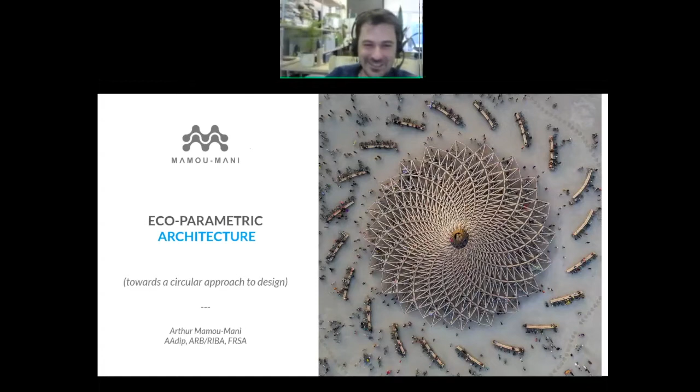You mentioned the WASP printers. We have quite a few of those, the 3 meters one, which allows us to do one-to-one, very, very large scale models, which is something that wasn't even thinkable when I was at the AA 10 years ago, where we were just, these tiny printers, these tiny lasers. But we knew something was exciting about it, but no one realized that they would become huge machines

that could actually do architectural components. And I just remember working in a practice and thinking, it's a shame, like I cannot use my skills that I learned. And there's no company that allows me to 3D print huge things, because we're talking, I don't know, 2008 or something.

And often when I go to Stuttgart and I saw these giant robots, people that graduate from there probably are like, oh, where am I going to work? Because where do they use giant robots? Like all the established firms don't have a robot in their office, right? And actually, it's surprisingly happening. But I guess in this case, the company stemmed from the fact that I couldn't find a company that really pushed that to the level that we could push it at the same time.

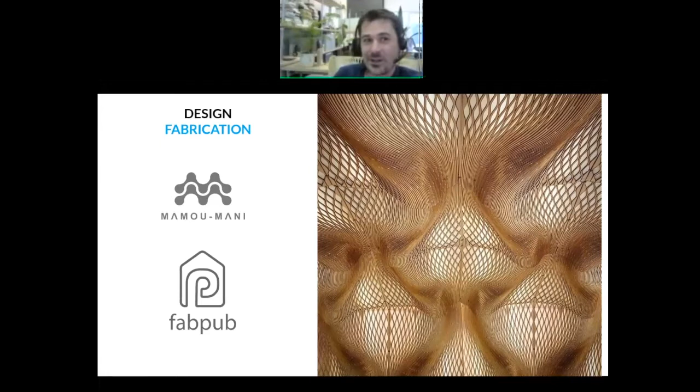So then I sort of freelanced as Mamou-Mani to help people, and then it became an architecture studio, and we ended up being hired as architects, which is why there's this duality between an architecture studio and a fabrication space. Both companies are now doing well, but it's funny how the architecture studio was maybe more recognizable in terms of an income stream. And so we ended up helping FabPub a lot until FabPub had a life of its own and is now doing maybe better than us.

So it's an interesting duality between what's very personal and very identifiable as an architecture studio with a signature, and then what's very public and for others to use. And there is always this dance between the architecture and the fabrication, and the public and, I wouldn't say the private, but the personal. And so this is downstairs now.

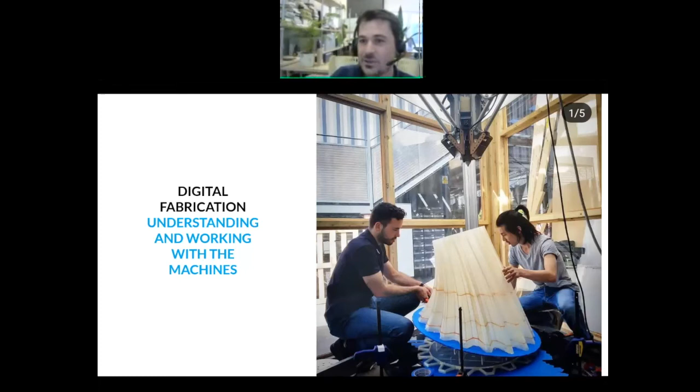Now that machine is inside our space, but one thing that we were trying to do is understand those machines and not just send things that have nothing to do with what those machines want. So we were working on several things, including our custom G-code software like Silkworm, but also large scale machines that could break the barrier between small scale 3D printing and huge cranes. When you're on site, obviously everything is messy and it's unlikely that we'll just be extruding a gigantic building. I mean, maybe we will, but a lot of prefabrication is very important.

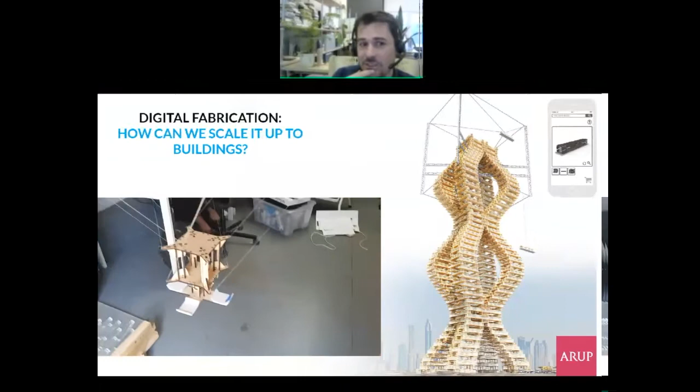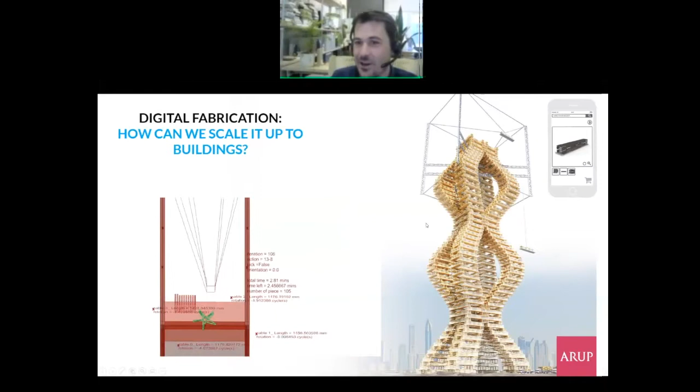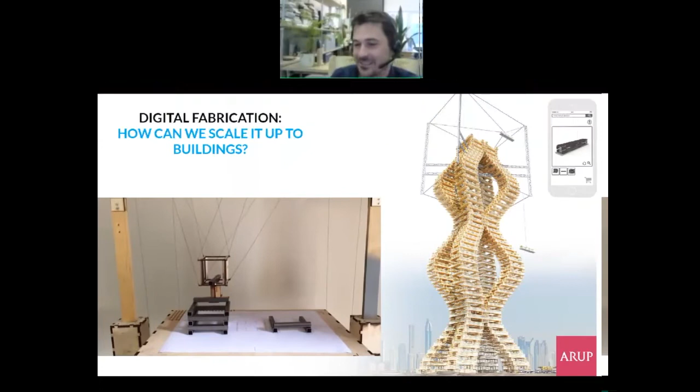So we won a grant from Arup to develop a cable robot, which is really the merger between what could be a 3D printer and a spider cam or a crane. And the excitement came that we could possibly build skyscrapers with that and then unbuild them when you don't need them anymore. And I always witnessed that we tend to see architecture as permanent, maybe it's because I go to Burning Man, but really when you go to nature, when things don't work out, they die. When you're in cities, you build a huge structure and then it just remains empty if the economy collapses.

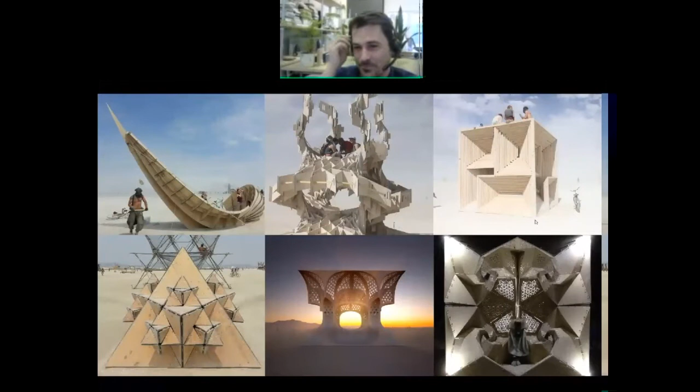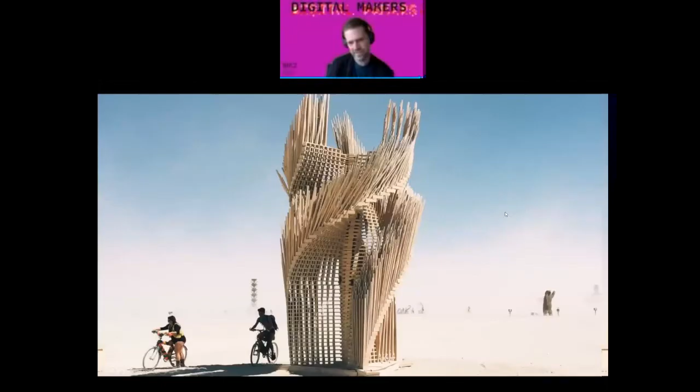And so in the spirit of what we learned at Burning Man, and I'll explain a little bit about that place, the idea of leaving no trace, or being able to do an architecture that can leave no trace, is extremely important. In the context of Burning Man, but in the context of the circular economy, I don't know if you know about the three: reuse, repurpose, recycle, reduce the use. All of these are very much in line with the idea of designing something that can also be undesigned or disassembled or removed somehow, so that you can leave a space the way it was. And so those are really interesting aspects of Burning Man that we brought back. And I'll show you how it scaled up to the temple at some point.

But then we thought, well, maybe we challenge them and ask if we can use local material, in this case sand, and see if we can actually use technology with local material. And so somehow we convinced them to use this sand printer. I'm sure you know that they're used for molding metal. And so the companies there were just not used to using them for 3D printing a piece. And we had to build and destroy so many of them before we actually got to a sense where the minimum thickness was strong enough to handle people climbing it and so on.

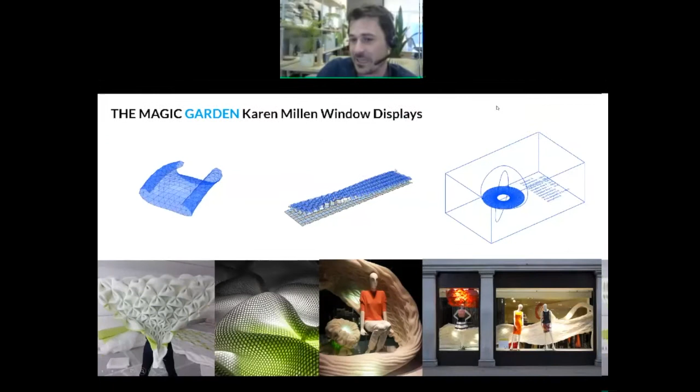Boom, Weaverbird. And everyone started sharing things and noticed a hole in the ecosystem and just jumped in to provide help on that hole. And how amazing is that everyone came together to do that, mostly for free, just for the love of sharing and gift. And I thought this was a very inspiring thing. But again, how do you apply it in practice? How do you apply Kangaroo or robotic software in practice? And there wasn't much outlet for these at the time, apart from maybe formal exploration.

So quickly, you mentioned visual merchandising. The Royal Institute of British Architects noticed that I was interested in craft, and they paired me up with a retailer called Karen Millen, a fashion house, and said, well, I think that could work out. Here's a shop window of 30 meters, do something there. And I started showing them the tools, genuinely thinking it's interesting to use your material and apply some parametric intelligence to it. And I showed them this simulation, and they were just like, that is incredible. That means we can use our materials, link them with some kind of three-dimensional simulation and create variation on our materials. And not only did it create a shop window installation, but they used it for their own collection. They ended up giving us 5 projects.

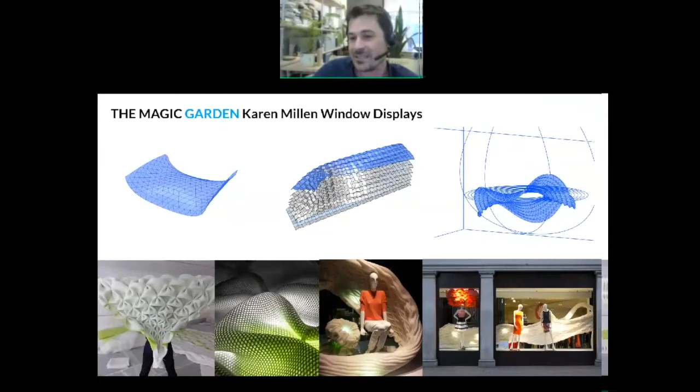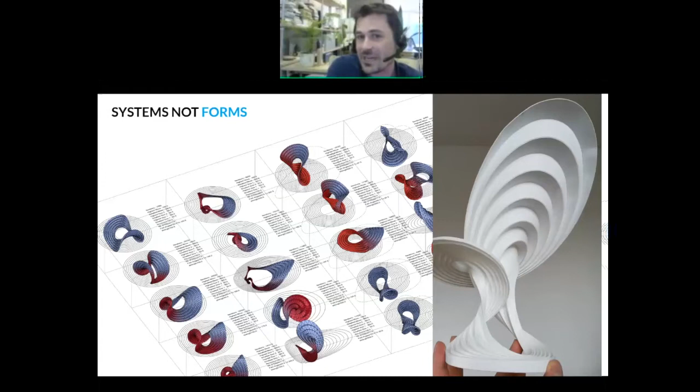So we ended up somehow becoming like this visual merchandising where we did so many pop-up stores. And I think it's because the scale of the printers, the scale of the lasers we had could only lean towards either pavilion or shop windows or pop-up stores. And it was a big period of pop-up stores because at the time everyone started shopping online, so the main street was doing bad, and so experiential marketing, all these things started to emerge. So we ended up doing a lot of that, and it wasn't part of the business plan, but it just happened. It's interesting to see where you end up with that technology.

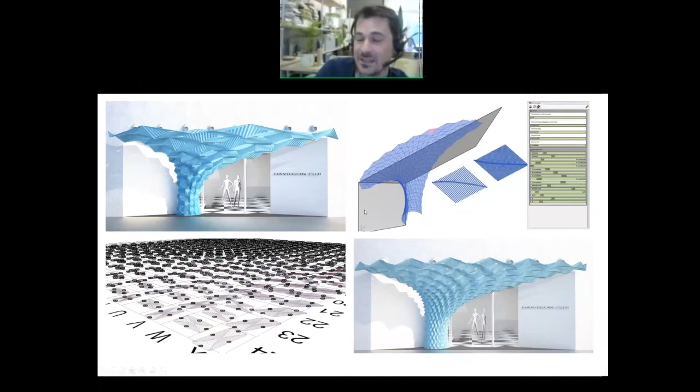And so these are matrices. We would explain to people that it's a parametric design, so it's not just one form; it's a system of forms. And this became really important in the way that we communicated projects and that we showed that what we design is not a design. It's many. It's almost like a sort of DNA of designs that could self-develop.

And I think that's really important because the word design is loaded. It's loaded by the ego. It's loaded by the idea that the architect is drawing something and then it's all in his or her mind. But it's not at all like this, and it's never been in our practice.

And I say this genuinely because, for example, this was Buro Happold, the engineering company that saw the shop window next to them because it's on Oxford Street, and they said, "Well, can we have it in wood? Because it's our anniversary and we want to have a special zone and we want to feature wood and technology." And of course, I had no idea if you could do it in wood, but we noticed this open source technique called lattice hinge, and then ended up doing the same process we did with the Karen Millen stuff, but with plywood. And so we reparameterized.

I mean, you probably all know all this. The surfaces. We mapped this lattice hinge, compressed the NURBS domain, and then created curvature based on where the compression of the Bezier spline is, et cetera, which allowed us to do these flowing geometries, and all these possibilities were then implemented into these ceiling panels that had all kinds of technology behind it.

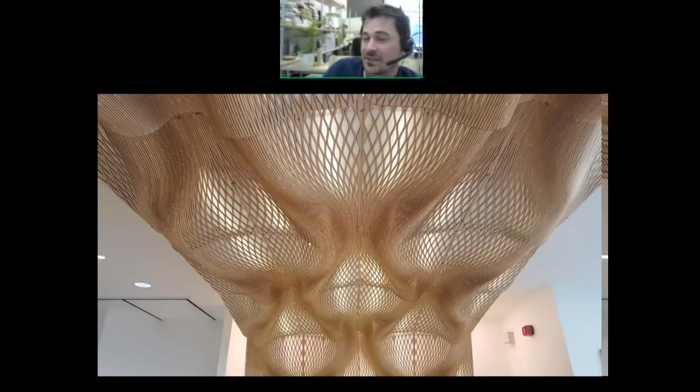But obviously, there's no contractors that can just install that. So we ended up being the contractors, and so we installed this. We did all the machinery, the linkage, as much as we could, the building regulations aspect, the certification, the acoustic panel, et cetera. And this gave us a lot of freedom because if we failed, and we did, we failed many times on that project, we could redo the entire thing minimizing the expenses because the raw materials are really cheap. And the laser, we managed to fundraise to get a laser for our company. So we ended up being able to experiment and iterate so many times. And there was no choice but to do that.

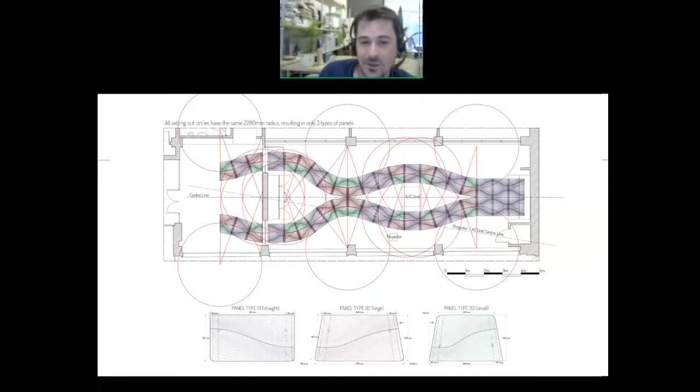The boss of Buro Happold was like, can you round the edges? After we built the entire thing. Like, okay, fine. And so you look a lot less at your losses, and it's really important when you innovate because there's just no choice. It's new. Everything is new. There's no product you can buy.

And so this ends up developing product, not just projects, because we ended up using those wooden waves a little bit everywhere. And we installed it just now at the Orange headquarters in France. Obviously I can't show you just yet, but I'm happy to show you the variations, so many variations of the project, and every iteration we learn more. And so that's a fantastic thing when you end up developing a product as an architect. You can actually become an expert at something, and it's a weird thing. It's a wave, from plywood, but it becomes something.

A lot of what we do is obviously growing from parameters. I mentioned the idea of letting the simulation do things, and so this was a very, very early project, but it ended up becoming Galaxia. So that's why I'm showing that every project has the seed for our next project. So you probably can predict a lot of what we're going to do.

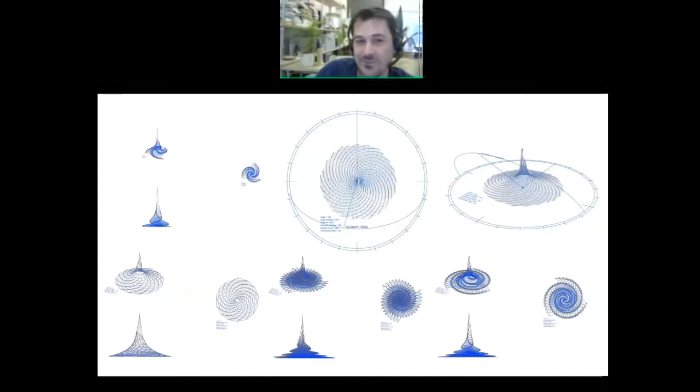This is using Hoopsnake on Grasshopper. There's Anemone, for example, where you grow things. So you tell a vector to go somewhere, and then you recurse. So you do recursion, and then it sort of grows. And then as it grows, you can actually add parameters like the sunlight entering the space and so on.

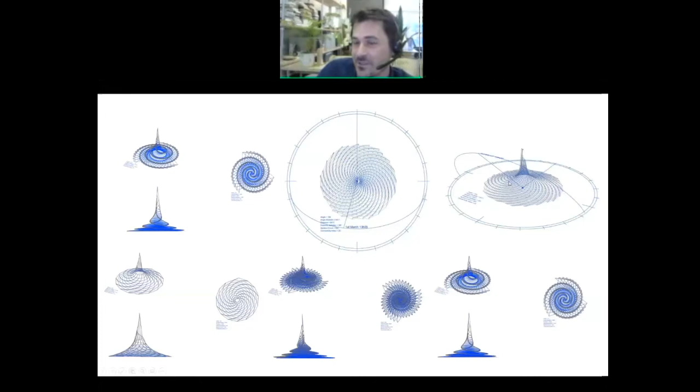And that project was a very early proof of concept for a hotel for astronauts for Virgin Galactic. And I show it because it explains a lot of what happened. You see, the system wasn't always a roof; sometimes it was landscape. And so that idea of using a system for not just one thing came back so many times.

And you mentioned that there's too many things we do, so it's hard to explain what we do. And it's a lot like this, a sort of open-mindedness to many things, not putting barriers, which might make it a bit hard to describe what it is we do, but hopefully there is coherence.

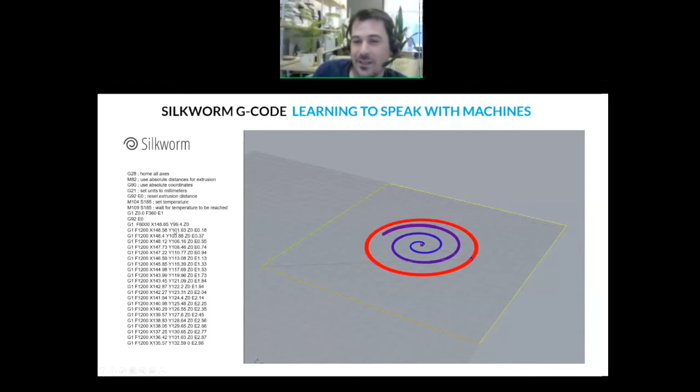So we ended up doing a software for 3D printing. I mean, it's a plugin really, and it's just extruding G-code from polylines to give us that freedom to print things up in the air. And now there's plenty, like robot softwares and things like that. But the idea originally is, instead of creating a shell and meshing and slicing it, to export the movement and control the G-code as you print.

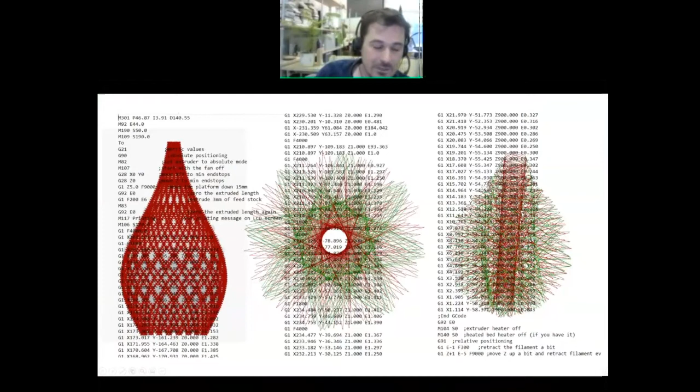And so this kind of opened up a whole world of possibilities for us because we knew that we could then be freed from having objects that are solid, from having forms that we design, and let the form be guided by the parameters of the material we were going to use.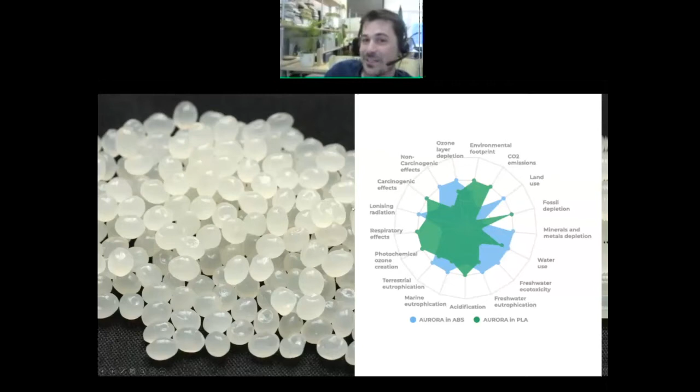And we realized that if you use ABS, the conventional plastic, versus PLA, a lot of things are way better when you use PLA. One being, of course, the toxicity of the material, the provenance, the depletion of petroleum, and so on and so forth. And when we realized that, we're like, oh damn, we should talk about it, because we use PLA because it's low melting point and therefore it's good for 3D printers. But what if we actually explored that as an actual plastic to replace the plastic that we use?

And this was the Conifera project that we developed with COS. It was the managing director of COS who was open to the idea of exploring new kinds of materials. And so this project was really an attempt to see the potential of this material as a building material. A little bit crazy because, one, it's a huge project. It's about, I don't know, 30 meters long. It's made of 500 of these bio bricks that were huge as well, and we had to print it in 2 months.

And that's where I think the intelligence of distributed manufacturing happened. Our lab couldn't build all these things, so we called all the labs around Milan that had such a large printer, and we ended up distributing the files together. And that's a really powerful thing, I find: when you start using code and people have machines that work with your machine, you can then distribute locally the manufacturing of things.

And so that really opened up a whole perspective for us, and it's why we ended up wanting to open more spaces across the world so that we can actually share the codes. So it's a real new world where we will share files, not just the software. And it obviously comes with a lot of challenges, but from Conifera to the SandWave, we've noticed the power of sending these files around. This was the SandWave. It started with giant Conifera cones, but we quickly realized we didn't have the right machines for it.

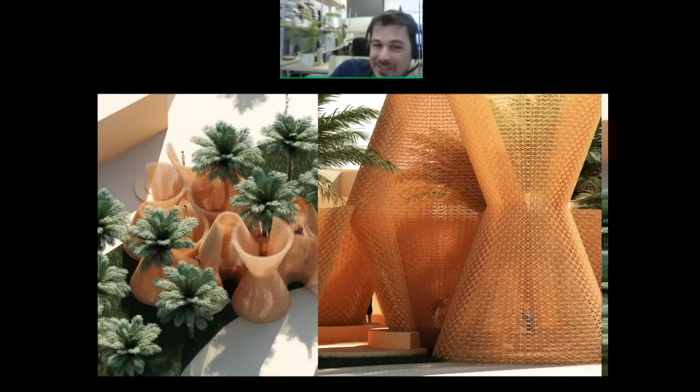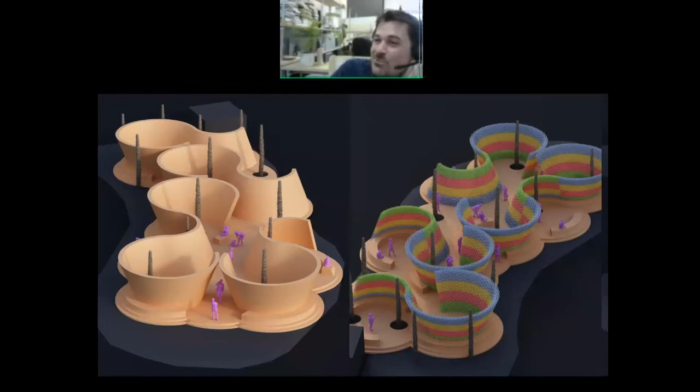Now, that's why design in that world of digital fabrication or digital makers is a little bit special, because you cannot design something and expect a contractor to do it. You have to first find the contractors that can do it and then design. And that's really weird because it doesn't follow the stages of work. Usually you have feasibility, concept design, and then you find a contractor, you do a tender.

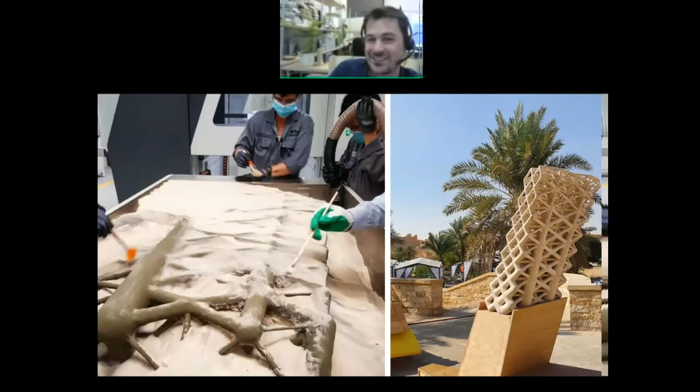But when you know you're going to use digital fabrication, if you do that process that is so linear, you'll end up with something that doesn't work. You'll have to redesign everything. So you go back to square one. So you might as well find a place that can make, and then work with that place that can make with you.

So here we found these giant sand printers. We knew the dimensions. We knew we could print like a cube extruded. So we ended up printing these in a sort of yin yang fashion. And so we had two components to create two kinds of curvature. And then we ended up printing a lot of them.

But it was really, in that sense, hand in hand with the manufacturers, because if you can imagine, this is in sand. Sand doesn't take tension. And so we had to calibrate our Karamba model. We used Karamba with our engineer to actually get the right thicknesses for the right spot. And so that was a really, really interesting process.

All right, time to take you to, I guess I have about 5 minutes maybe. Time to take you to the desert. I'm still okay, right? Yeah, you're still okay. Maybe we can have a quick talk about this. Yeah, of course, happy to pause and then go back to it. Yeah, exactly. Great, let's try. There's so much of your work here, there's so many questions already. So I'm thinking, gosh, how to get all the answers.

But you mentioned a lot of things that are super interesting. It means unraveling the whole process of architectural design, like the making, and you said you have this kind of swarm of printers in Milan that could just print your work, so you could team up with others.

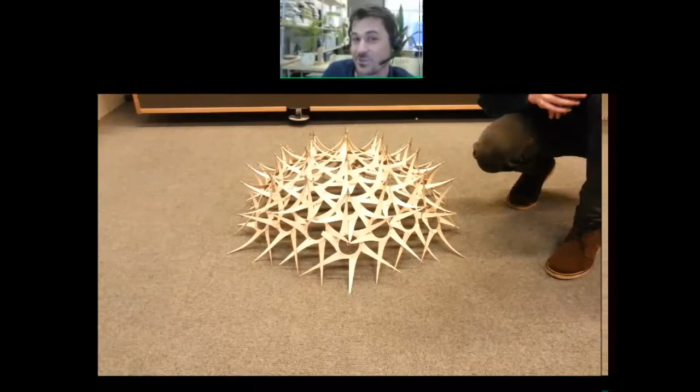And so our students were studying Buckminster Fuller, studying Burning Man, and they're obviously very broke as students. And so they ended up developing really interesting systems where we were saying, well, what if you took a sheet of plywood, like the usual 1220 by 2440, then you cut it in half, and then you end up using symmetries, and then you end up doing reciprocal structures from them, and so on and so forth. So every project had to come with a material intelligence in terms of off-the-shelf stuff.

Like this is a hexayurt. It's a really insulated place where you take a sheet of foam, you cut it in half, and then you get this sort of ecosystem of yurts where you can live in there. And so our camp where we lived was made of those. And this is an open source system that we can participate in.

So not only did we have to design and build and fundraise, but we had to also live in the desert for about a month for some of those projects together with the students. So it doesn't get more holistic than that. And it's obviously a very personal journey.

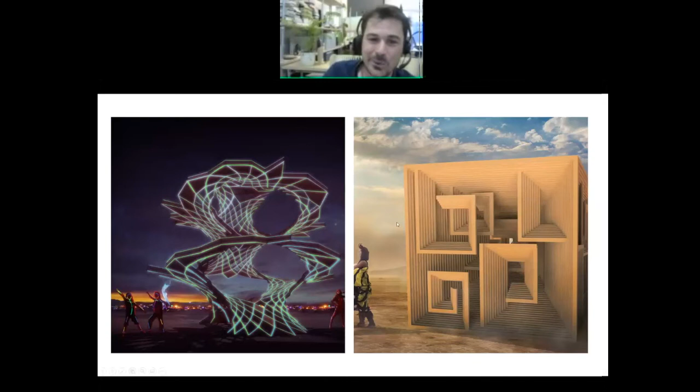But I wanted to show you these two projects before moving on to the temple, because on the left we had this crazy parametric, complex numbers based reciprocal structure, and on the right we had this simple 2x4 offsetted a little bit with a screw. And I was like, this is going to be too simple. We need to work on this. It's so cool, and so on. And I think my parametric ego got a good lesson there.

So this was the structure on the left. Everything was custom, no symmetry. We received these from the laser cutting company with no names. So a giant puzzle that we had to reassemble and realize which was what. And the other piece was just cut to size, off the shelf timber, 2x4, 4x4 inches, really, really tidy on the truck.

And then this guy, we just bunched there, and so obviously then you realize why the truck has a say in the design. And I think for me that was a massive lesson. Is the truck the designer? How to transport things, how to assemble things, is that part of design?

And very much so. We didn't finish that project. It looked weird, but then it's Burning Man, so you cannot finish a project and it's fine. But these guys just finished on time and they were enjoying themselves on this really beautiful thing. And we were just like, oh, that hurts. And then you can't even climb it and so on.

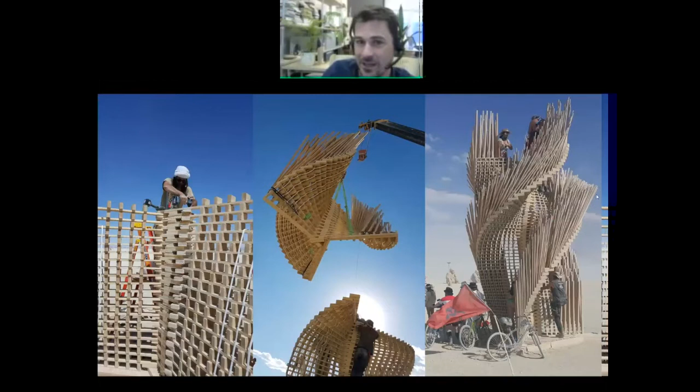So those two projects had a baby before Galaxia, which was Tangential Dreams. And this was just a circular saw and a matrix of measurements that we extracted from the graph mapper to create these tangents where people could write their dreams on. And this was really good. We finished on time. We managed to illuminate it with these really nice LEDs, the tangents would catch the light, and people would write all their dreams on that. So there was a real interaction with the community.

And so I think it sort of resonated with the other piece at Burning Man that they build every year called the temple. And the temple is a space where it's actually quite deep. People put really personal messages. And this is what I saw the first year I went to Burning Man. This is a CNC built, no screws, no fasteners, amazing pyramid by an architect called Gregg Fleishman. And he built this huge, huge thing out of a CNC.

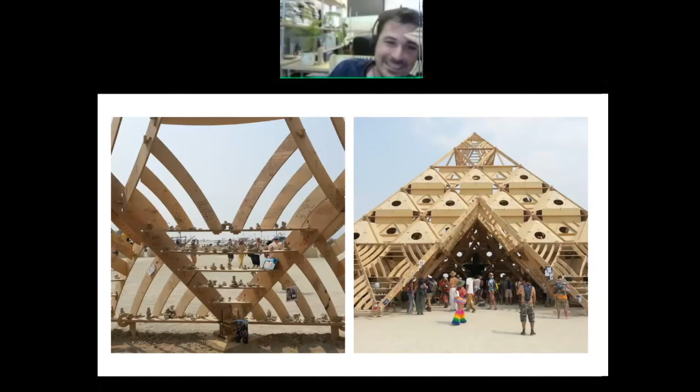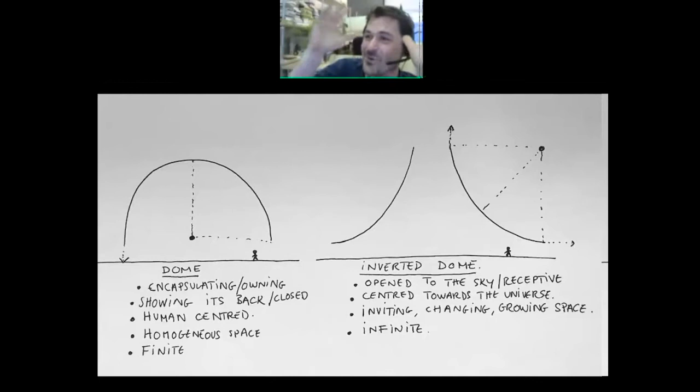And remember when I said we weren't taught how to use CNC for building or how to use laser cutting. And I saw this, I'm like, okay, it is possible, right? And who would have thought out of all places in the desert I would find that? This was 2013, and I'm like, okay, I want to build something at Burning Man at the scale of a temple, not just because it's really deep and meaningful. It has content that people relate to, but it's also a really nice way to prove that actually we can be the makers of our own project, just like they were at the age of the cathedrals.

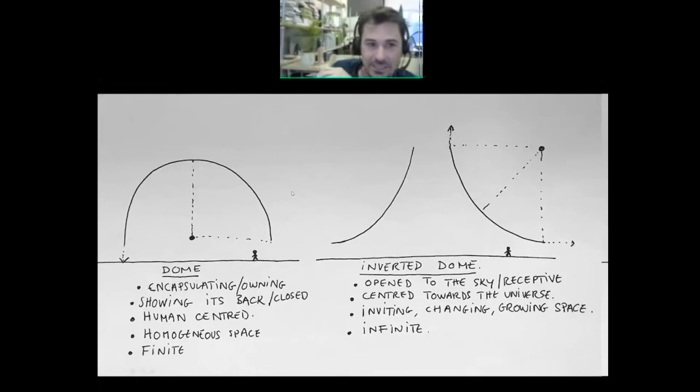The master builders were designers, makers. That was the best example, the cathedral age. And then I was like, okay, so the dome is obviously something that all temples were having as a sort of way to own the celestial field around us.

But the inverted dome relates to what we understand of the galaxy, the black holes, and the fact that black holes warp space and time, and so we have a much better understanding of our universe now. And so the temples really can relate to our understanding of that. And I say this because we have Stonehenge here in the UK. You have many places of spirituality that relate to the environment somehow, of our understanding of nature.

And now that we have a better understanding of that, I thought it would be interesting to make a temple that reflects our understanding. And obviously, it's an ambitious thing, but what I thought was really interesting here is that the project was started as relatively orthogonal as a portal, and then was sort of sucked into that black hole. I don't know if you know, but if you're close to a black hole, you get spaghettified because the difference of gravity from your head to your feet is so huge that you turn into a spaghetti. And so that's what happens to these modules.

They start orthogonal and then get spaghettified as they go up. It gets relatively hard to build, but they get smaller at the top. So this shows a lot of what Burning Man is. You see those hearts that are stamped by the community. That's just a guy with a giant stamp that goes around. And everyone has their activities and interacts with this.

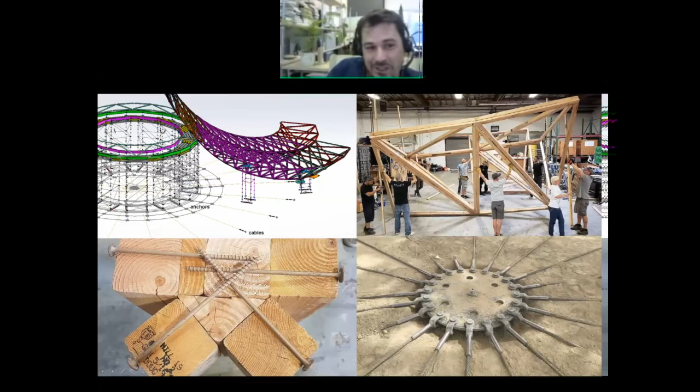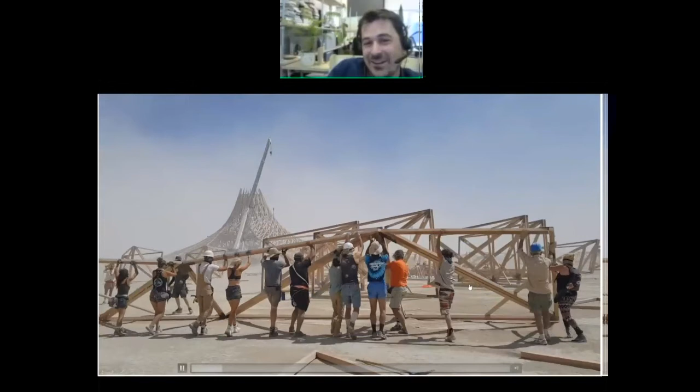And then off-the-shelf stuff, things you can adjust on site, screws, 4x4 timber, 2x4, half a 4x4, nothing crazily digitally fabricated. And then also assemblable by a lot of people because everyone wanted to participate in that project. We received about 600 requests to be part of the team. So we didn't have a shortage of people, but we definitely needed to find ways to have all these people involved somehow. Involvement was key.

And so here you have, I mean, it would never happen like this on a building site, but we built these bricks that could be folded as origamis. You had Simpson plates on here. And then people would, it was almost a celebration to close these off. And then the crane would come and pick them up and place them together. So we had this matrix of unfolded modules that were placed together to form the petals.

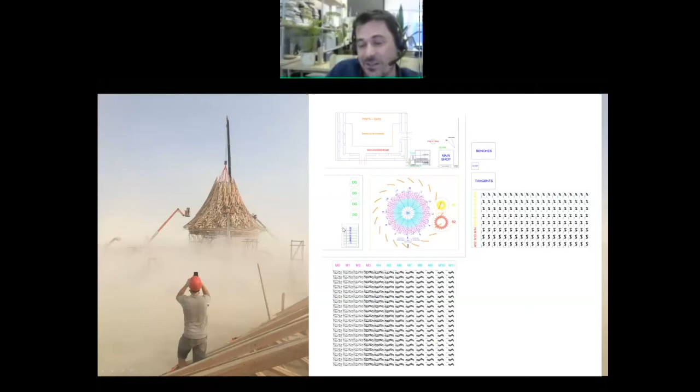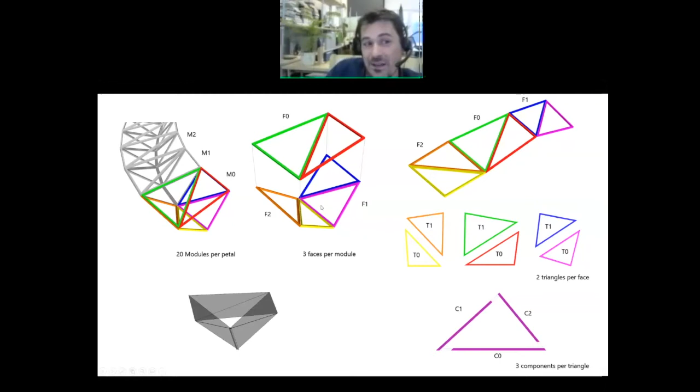The petals would then be sub-built into these, we call them bananas. So it started from the 2x4 that we cut beforehand in San Francisco and Reno, assembled into triangles, then placed into an unfolded brick that we then assembled together and put into these bananas, and then put the bananas together. So we gave this IKEA-like manual to all the builders, who were non-architects, non-builders. They were just people from all walks of life.

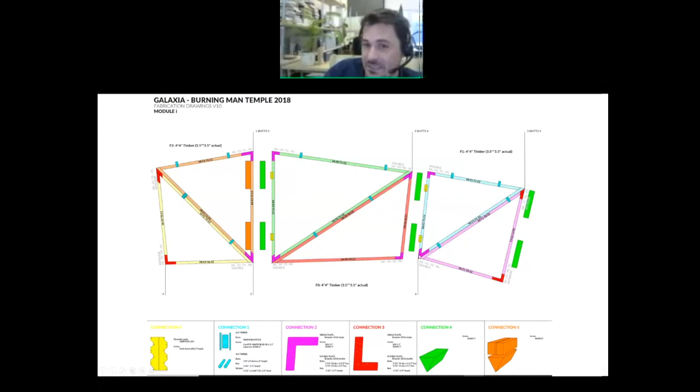And we used as much off-the-shelf stuff as possible, like Simpson plates, Simpson screws. The only digitally fabricated stuff was these corner pieces to reinforce the corners. And these were laser cut based on the forces going through the project. So we were told by Format, our engineers, that's the kilonewtons. That's what a screw can take. Deal with it. That's what happens when everyone is a volunteer.

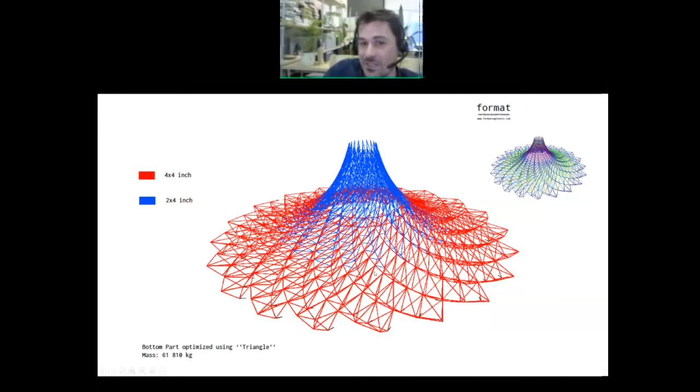And so we put this in Grasshopper. Obviously the number of screws depends on the number of kilonewtons. I mean, you see the risk we took, right? And put that formula in, and then the software will just output the plates. And then it would tell us where we could use 2x4 inch timber and where we use 4x4. And you had this really smooth transition between the pieces, which was really nice because all the pieces worked.

There wasn't a hierarchy of pieces. They would all work together, which is a great metaphor of our team to some extent. And so there was this real sense that every piece mattered. And that was a really beautiful way to involve everyone and let them know that, because it was really, really hard.

I got married in there because I knew that otherwise I wouldn't have a girlfriend by the end of that. So you see, taking risks, but eventually involving the people around you. So even my parents came by and my best friends and so on. And so we got married because the symbol of that piece as a temple was really, I mean, it would have been sad not to actually celebrate something spiritual in that place. And then we burnt it.

This is a big ritual, and everyone is like, you're crazy. Why would you burn this? And obviously, I didn't want to burn it. The Eiffel Tower is behind me, I'm from Paris. Yeah, we saw it. I had a secret wish that someone would say, yeah, it'll stay.

But obviously, people put very, very personal things in there, and to be honest, it was meant to burn because this is part of the ritual, and we didn't use that much timber. At the end of the day, we used so little timber that the structural density of that project was the same as foam. We talked to our engineers about that, and so it was a very light material.

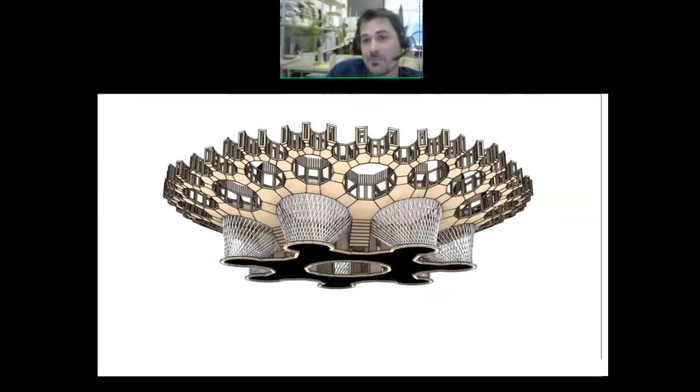Obviously, we don't want to burn it, and our next project, you'll see, is not something we are going to burn. We're going to disassemble, but then we have to reinvent the ritual that goes with it. So here we recycled all the steel. We had these crazy magnet rakes, and everything was recycled. We decided to reinvent that ritual of burning by disassembling it. But then how do you create a disassembly that's as beautiful as a fire? And so that was our next challenge before COVID happened.

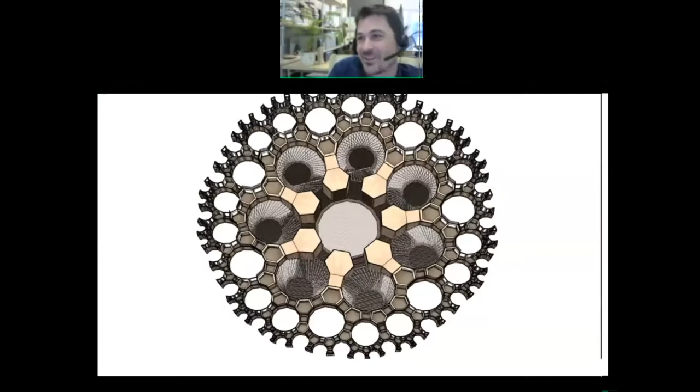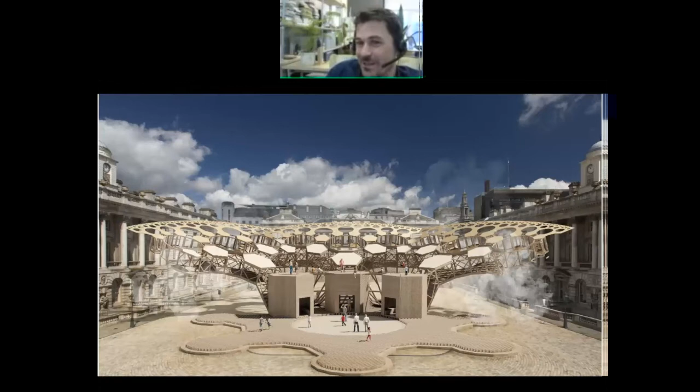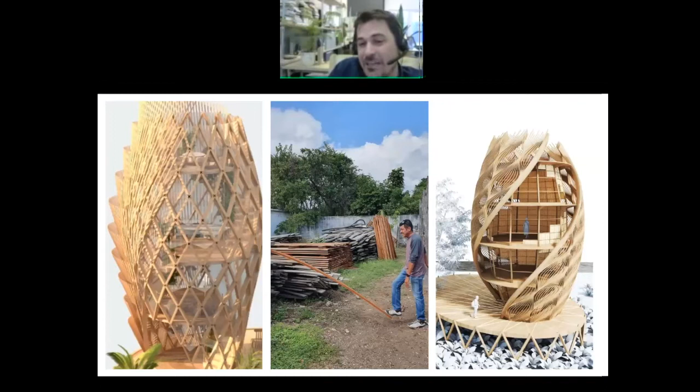And so we were going to disassemble this and bring it back to London, to Somerset House. We had everything sorted. We were going to build it, and then COVID struck. And it's interesting because you'll see where this ended up, a very unlikely location, but we ended up really learning from that process of using local materials. And those are two projects that we're building, one in Mexico, one in Bali.

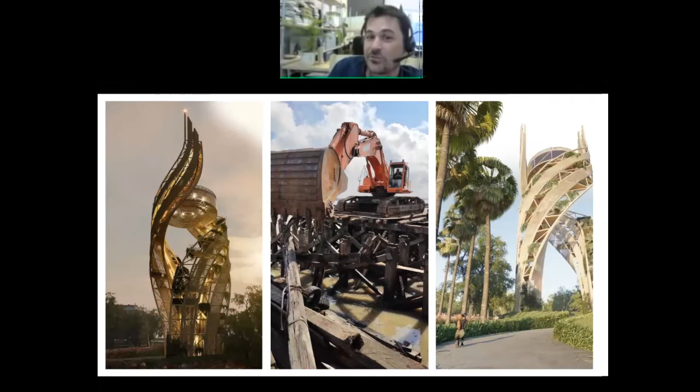And you see that every time it starts from this dude showing us how much his material can bend. And so instead of doing the usual grid shell, we bend the material and try to keep the material straight. We unfold the material and bend it back without cutting anything. But how do you achieve curvature from that? And then also we use reclaimed things. So this is an entire bridge in Borneo.

So it's a lot of trial and error. Like you basically step forward and then you just check if it's possible. Exactly. I think that's really fascinating. I mean, now I realize this is part of prototyping, but it's also very analog as well. It's digitally fabricated, but the human being is also a big part of this production. And so I think it shows that the scare that robots will take over and there won't be anybody building anything anymore, I think this proves that it's not going to be like that. Yeah, I think it's super fascinating to see.

Did you actually make the Burning Man Galaxia, did you calculate how much it would burn? Because it's actually very thin. So did you have to put more things in to make it burn? It burned so quick. It was actually relatively scary because we held a torch with my wife and we put it down, and then literally we had not even a couple minutes to go back before it was the image that I showed you.